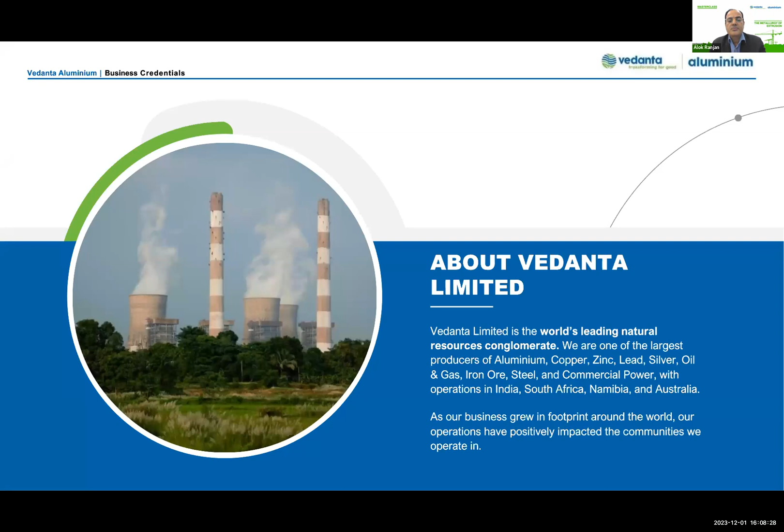So now we are truly emerging towards becoming a 3.1 million ton aluminum company with fully backward integrated operations with mines, and also 100% value added product. So that's the vision, and finally it's taking shape because investment is on the ground and work is in progress. Sometime next year, by end of next calendar year, we expect that all our planned expansion, planned investment will come through, and we will be maybe the second or third largest aluminum company in the world.

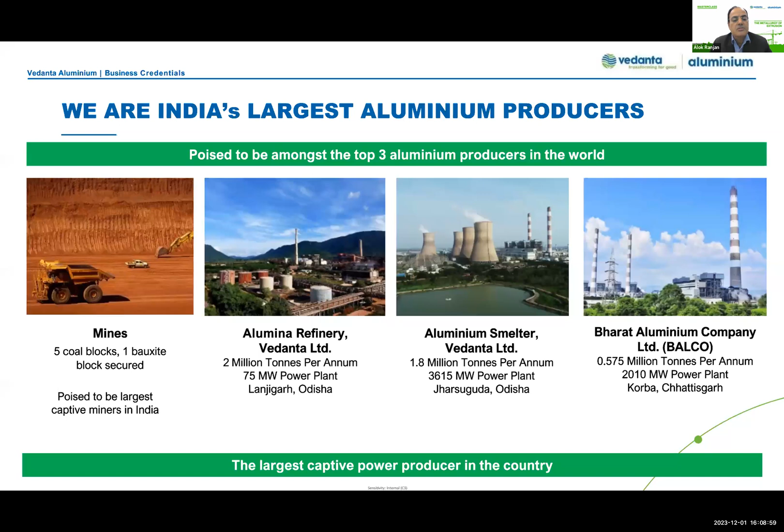Next page. Again, we are a company which has a full bouquet of services, so right from commodity ingot to various value-added products in the form of RP, billet, coils, so everything. Under one roof, we are in a position to cater to the requirement of the entire aluminum industry. And aluminum, as we know, is highly versatile, highly diversified in its application. And today we are in a position to cater to most of the applications.

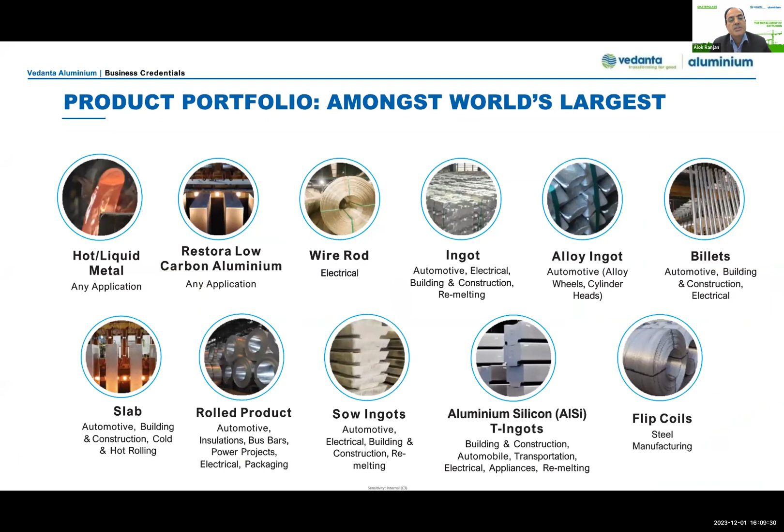Next page, please. So we take a lot of pride in a few things, that we are a company - and generally metals and mining need not be something which is incongruous to sustainability or the entire natural ecology. So we are very mindful of that, and we take a lot of steps. We walk that extra mile to ensure that we truly are considered a responsible company. And there are multiple steps which we have taken.

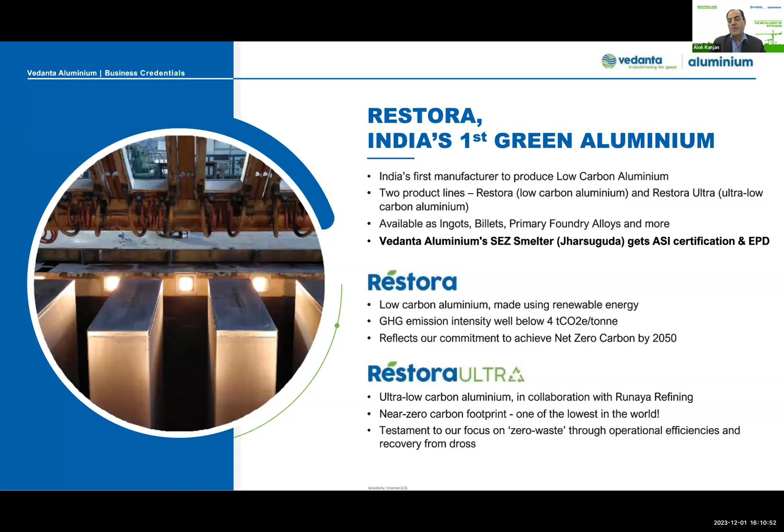Last year we became ASI certified. All our products from Vedanta SEZ have certification under environmental EPD. Last year we also started selling green aluminum, and some of it has the lowest carbon footprint, which we've started supplying in India. We encourage all our customers to engage with us, as we are in a position to supply green aluminum.

Moving on to our commitment to sustainability: we consistently rank among the most sustainable aluminum companies in the world, ranked second consistently. We were the first Indian aluminum smelter to have ASI certification for sustainable operations, with EPD for our entire product range. It has also become mandatory for products to be BIS certified due to a new quality control order, and we were ahead of the curve as one of the first companies to achieve this, so our entire product range today is BIS certified.

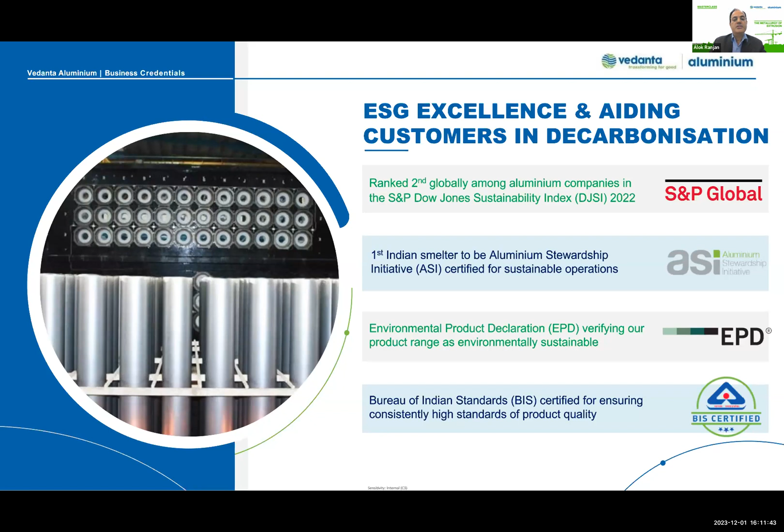Next, we offer a full range of billets from 6-inch to 12-inch, with best in class technology and various alloy offerings. We are very eager to understand customer requirements, and have a very active center of excellence and R&D team working closely with us. Today we are in a position to offer any kind of alloy, so if there is a specific alloy required, we are happy to work with you to develop that product.

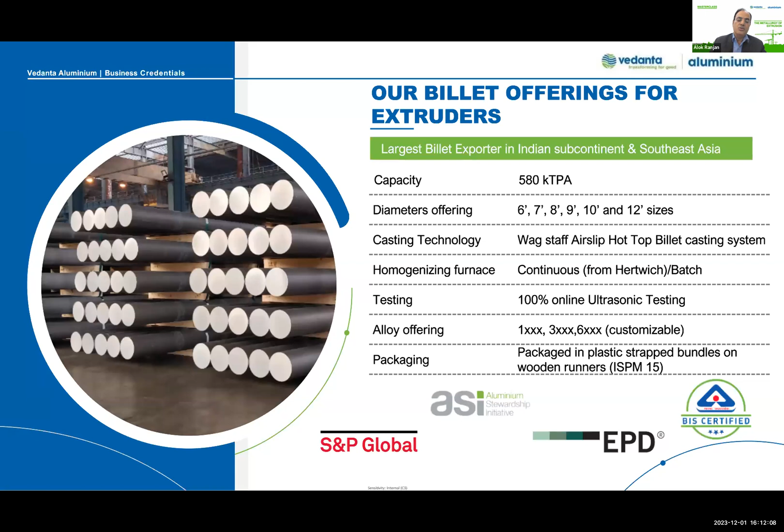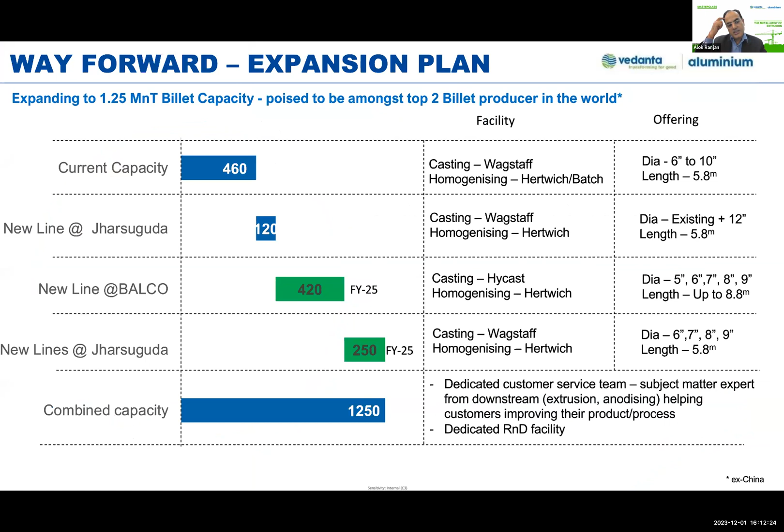We have very aggressive, ambitious plans to increase our production capability for billet. From the current 460, we want to go in excess of 1 million tons by next year, which will make us one of the largest billet producers in the world.

Reiterating some key strengths: we are consistently innovating, as innovation is at the center of our product development strategy. Over the years we've developed many new products like high-speed billet, high-strength alloy, machinable alloy, various series of alloys, and crash-resistant alloy, which find applications in diverse industries - automotive, defense and aerospace, building and construction. There are very specific requirements across the extrusion and building industries, and we have sustainably been able to produce all those billets for our customers.

We have previously talked about temperature control in the extrusion process, and we will touch on that briefly, but really the bulk of what we want to talk about today, based on customer inquiry, is on extrusion defects. So that will be the bulk of the presentation, with a specific segue into metal flow and planned scrap, really as a part of the extrusion defect discussion.

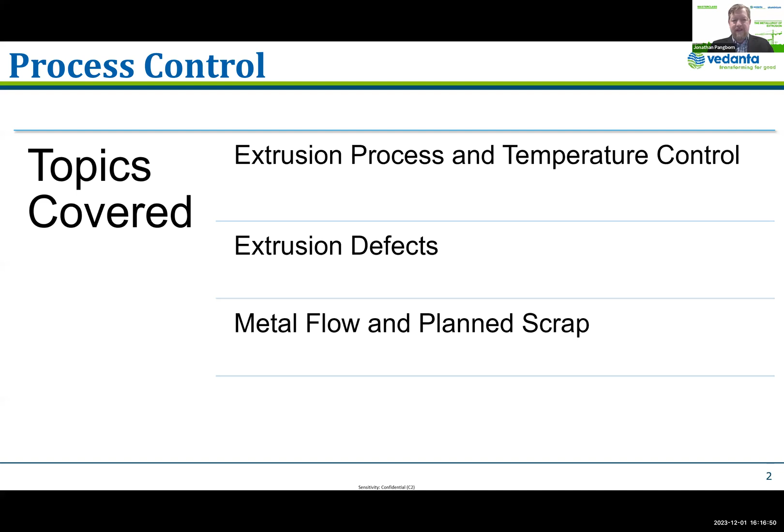I should point out, this is the scope of direct extrusion of 6,000 alloys. Other alloys are going to behave differently. For example, some of you are using 3,000 alloys, but a lot of these quality aspects are still going to apply. I do want to change my pointer.

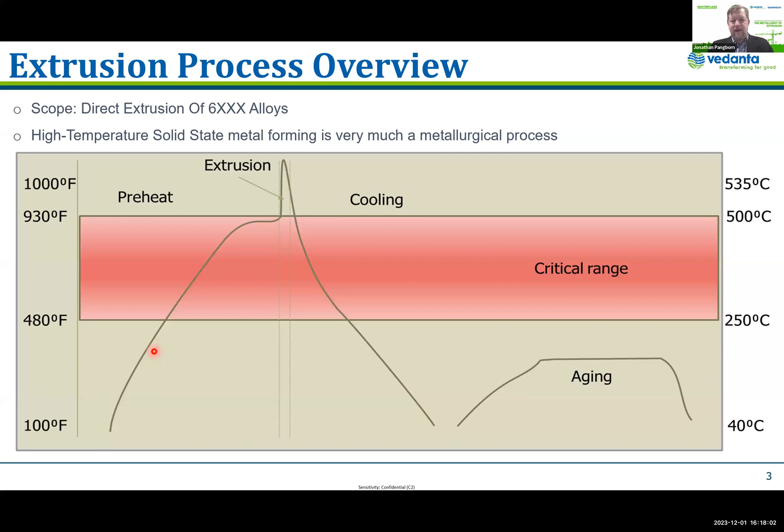There we go. But with 6,000 alloys, in addition to a forming process, we have a metallurgical heat treatment process. So I want to remind us that we need to be cognizant of that all the way through. And even though we're not speaking of strength levels and so forth in this presentation, there are effects on the surface as well. So here's the quality issues we wanted to highlight.

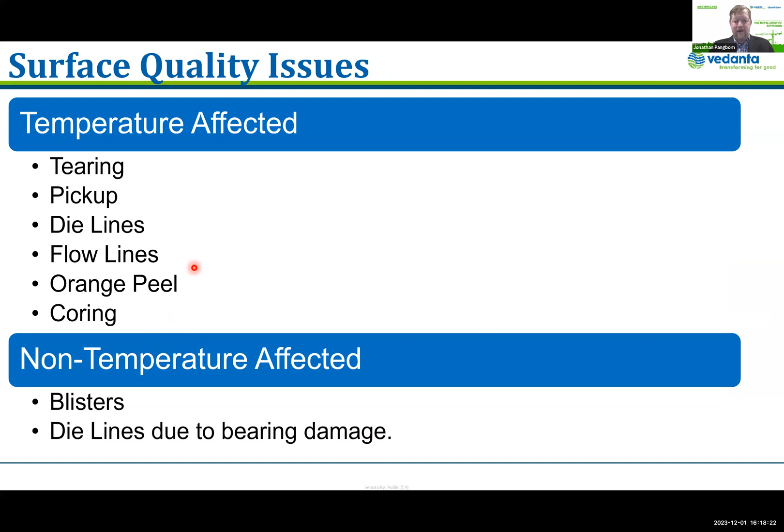I've divided them into ones that are more strongly affected by temperature and those where there's much less effect of temperature. I won't read those off. Many of them are undoubtedly familiar to many of you.

Basically, this is something we see, especially on sharp corners of dies and so forth, or at screw bosses. And in order to avoid this, we really need to look at the temperature control locally at that detail, and perhaps make adjustments to the process to avoid this. I would encourage you also to look at dies. If you have a die that is sensitive to this, work with your die shop, work with your die vendors. Really what you're doing is trying to even out the flow across the profile to try to avoid this.

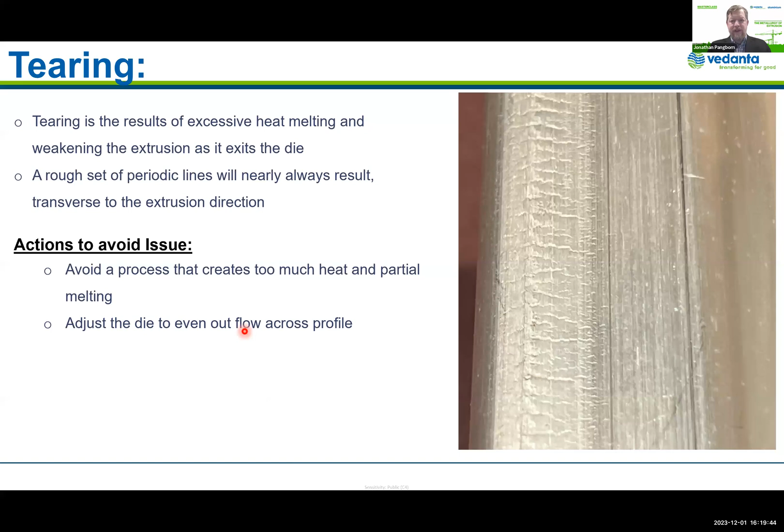It's a very complex defect, but fundamentally it's forming in the die as you're coming off the die bearing, and we'll have a diagram in a moment here. It's sort of spalling off, and in fact sometimes you can see this type of pickup that is actually very lightly sticking, and more than likely you could actually brush that off with a gloved hand or a little piece of cloth or something, and that would actually fall right off. It's very weakly adhered more than likely.

Some of the factors that we look at when we have these problems are with the die, primarily, looking at the shape of the bearing, making sure that it's the correct shape, that it hasn't been rounded, that your die bearing angles are controlled, and then also your treatment of it, specifically for most products, it's going to be a nitriding. There's other coating technologies, but usually it's nitriding your tool steel and making sure you have a very hard, resilient layer.

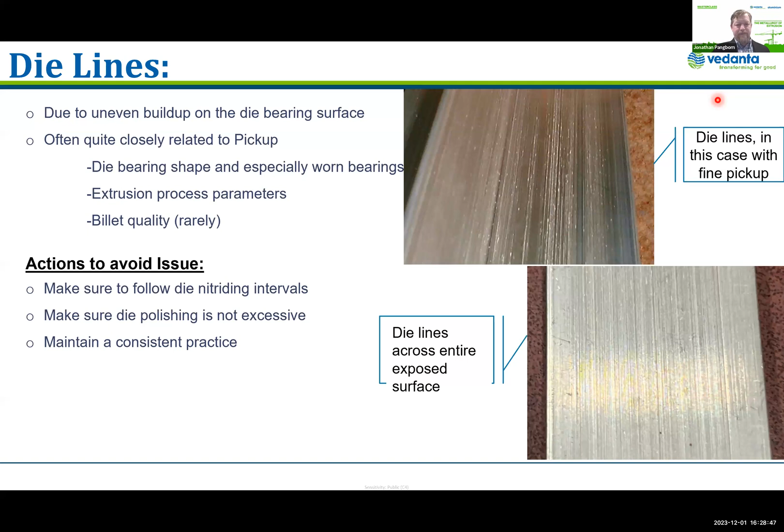But as your metal is going past the die bearing, the conditions continuously change from a high pressure situation to, as the metal departs the die bearing, really there's no pressure, no external pressure on the metal. The aluminum profile is self-contained.

So as that happens, you have a very dynamic situation where you have a sticking friction, this adhesive layer that we referred to, and there are a number of publications from different research groups that are very interesting if you really want to get technical.

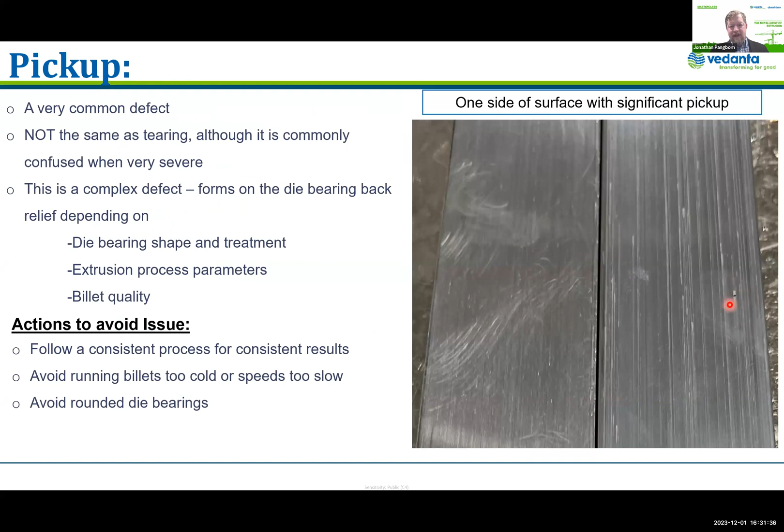Yeah, I did mention the bearing rounding is probably the single biggest factor that you need to look out for, that is at times not a controlled parameter at extrusion plants. You're controlling temperatures and speeds, for example, but you may have some inconsistencies in the dies that are coming out. Orange peel is, yeah, just like to hold on here.

One of the questions I've just received is, once you receive a die line or pickup, what would be your immediate next steps? The default would be, of course, evaluating whether that may be acceptable for the customer, if they can tolerate a little bit. But if it's deemed unacceptable, you would normally expect your crews to pull off the die and go on to another order, unless, of course, you have a backup die for that profile.

Yeah, but you don't want to waste time going back and forth and making scrap unless you have the resources in place, the right supervisor or manager or an engineer or something, where you're able to make adjustments to the process and have a good chance of really learning something from that.

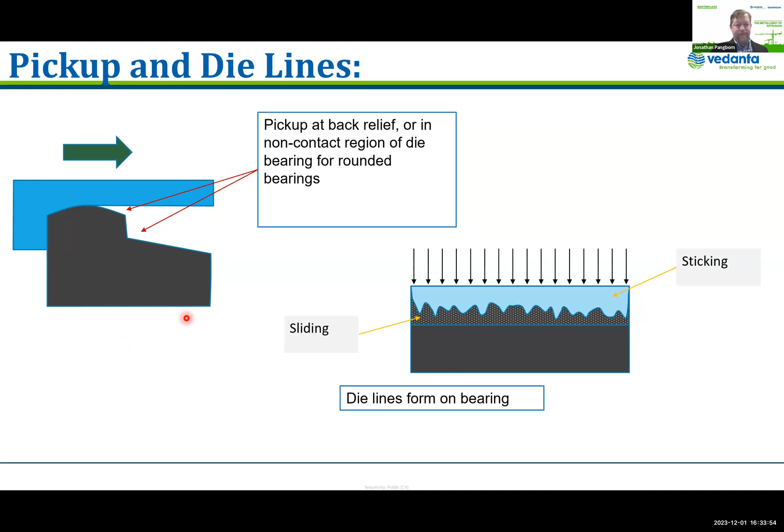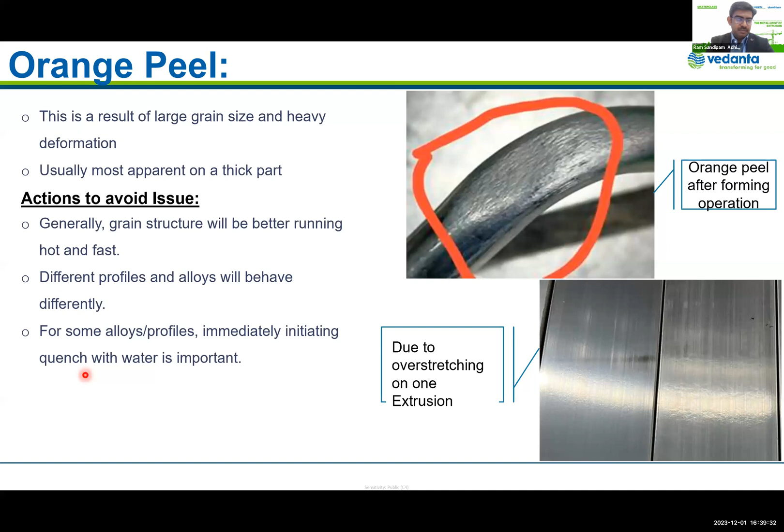Right, and I think in a single question you have answered two more questions. One was if this is applicable to 3000 series alloys as well, which you have just said that yes, higher manganese content can play this role, and whether there will be some role to play on the grain sizes in the orange peel issue. So I think you have also spoken about that, how that can impact and how we can optimize that. Very good. So I think you may please go ahead.

Okay, perfect. All right, moving to another common issue, blisters, a much different issue. This is not a metallurgical issue, and while temperature can affect the way the metal flows, you could consider the air or oil that's trapped in the blisters a form of contamination. It's not, net temperature control is not causing this.

It's about avoiding contamination of the process. These, of course, are air, possibly oil, that is in the process, and when the pressure of the die is released on exit, you very often can hear these blisters pop out, and you know, we'd audibly hear that there's blisters forming, and then you look and you see them. But it's basically controlling what's going into the container.

There's anything going into the container, of course, it has to come out at some point. And for air, for example, every time you're loading a billet, you're also putting air in there because the billet is not a tight fit. It's a very loose fit to the container, which is why we run a burp cycle, upset the billet, and then release the pressurized air, and why we pay attention to the sheared surface and so forth.

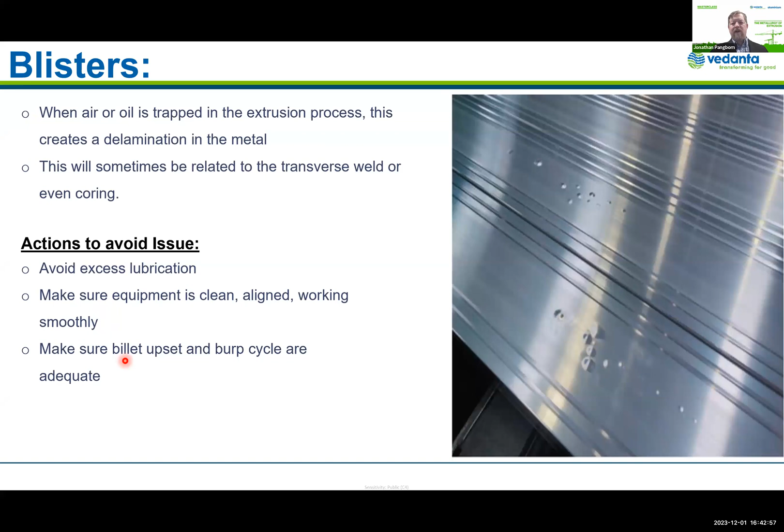And I do mention here the billet upset and burp cycle, making sure that those are set up properly, so we're removing all the air at the beginning of the process.

Any air in there, the next billet's going to seal that in. It's very unlikely to be able to burp any of it out, certainly not all of it, and we're going to see blisters probably towards the front end of the extrusion run out. That's actually another thing to consider. If your crews are reporting to you that they're getting blisters, ask questions like, where? Is it at the front end? Is it the back? Is it every billet? Because that is very important to problem solving on where blisters are coming from, because they can also happen anytime we aren't getting the air out.

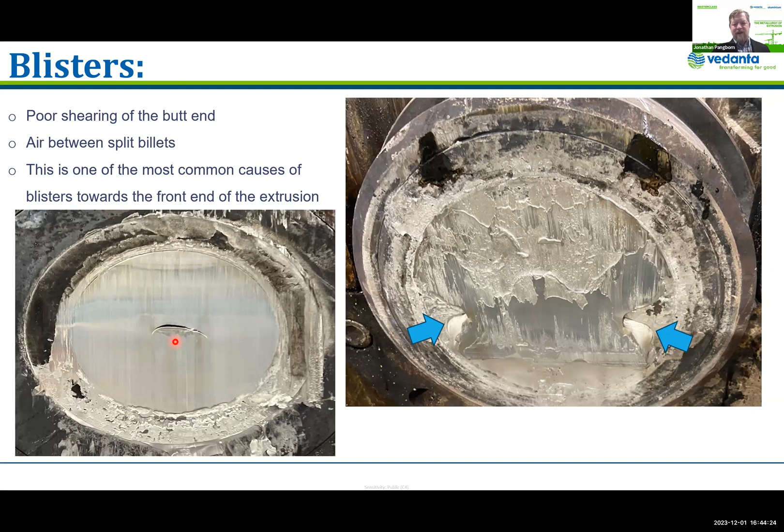Moving on here to coring. Your container is set at a temperature, hopefully well below your billet temperature, to arrest the flow of the surface layer, the segregation layer, or as it's roughly termed, billet skin that is on the surface. At the container surface you have almost zero metal flow, and then towards the middle the billet is moving much more easily. I think of it as analogous to a river. If we have a river near where we live, we know it's moving much more quickly in the middle than on the sides.

That's a good analogy for what's happening here, and in particular if we have good temperature control in our container, this black here is representing that billet skin. Rather than proceeding to flow into our dies, it's being collected in the back of the billet, which ultimately most of it is removed when we shear that butt off at the end. However, in order to actually get all of it, even with very good billet quality, very state-of-the-art, we would have to take like 4 inches, 10 centimeters, and then we have other problems, for example the blisters we just talked about.

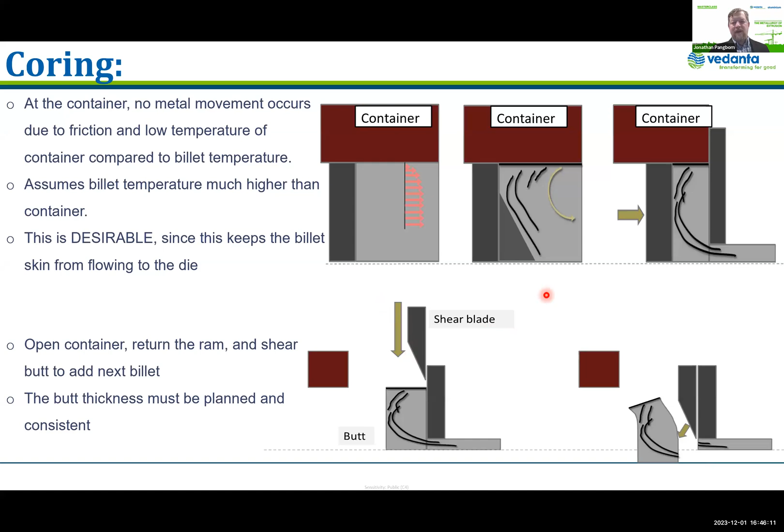So in practice, we have the shear coming down, taking the butt off, and most of this billet skin, but we're likely to have some of it in the die or in the profile on the next step. And then when we add a new billet, of course, anything that's in the die is going to push out. Remember, anything that goes into the process has to come out. By cutting that butt off, in addition to the pressure buildup and so forth that we can't have for pushing to a paper thin butt, we're purposely removing the majority of this.

But in this example here, a weld pocket and a stop mark on the extrusion, what will happen is anything that goes actually into the extrusion will be in the billet that was pushed. Anything that is remaining in the die, you won't see. You'll see it on the other side of the stop mark on what we would call the second billet, the billet following, but it's actually still cleaning out in front of the transverse weld some of that.

This is important for some products, but not all. We need to be careful with structural and especially heavy structural products where these impurities are not able to break up, due to a low extrusion ratio, but with low extrusion ratio dies these can be very important. Of course automotive or structural, any of you that do precision tubing, would have to be very careful with this, with your thin walls.

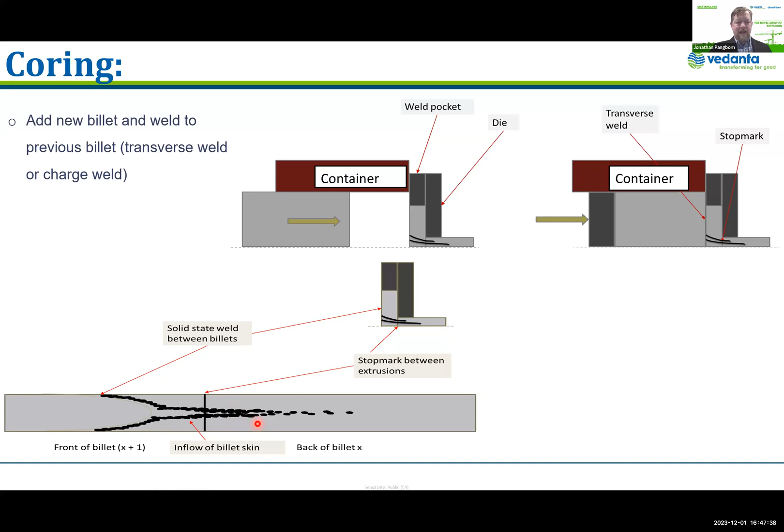And there needs to be a mechanism to cut this out. If you cut on the stop mark, it's going to look like this, where you have a transverse weld, which is difficult to see in this graphic. I don't know if you can see that on, yeah. And then you have inflow, and then it's proceeding into the front of the previous billet, which is actually the back of the previous billet, which is showing the back end of the runouts. So understanding how much scrap you have to take and following that is extremely important when it comes to these type of products.

I mentioned some of these type of products before. There can be others as well. These requirements can be determined experimentally quite easily. For example, if you go from your stop mark and cut periodically, whatever makes sense for you, every 10 centimeters or every 20 centimeters, and etch it even in your caustic if it's fairly fresh in your die shop, you will be able to see this and make some judgments on what's acceptable experimentally, and then make sure that it's followed and that your press crews understand the reasons for that, so that you avoid risks downstream.

We got a couple of questions on coring. When you're talking about coring, I think piping is a similar kind of defect, and in other languages it's the same thing. Yeah, that's equivalent terminology, also called piping, and I believe it's because if you have a very heavy shape like a rod, that's what it will look like - a circle in the middle, very dark circle after etching, like a pipe.

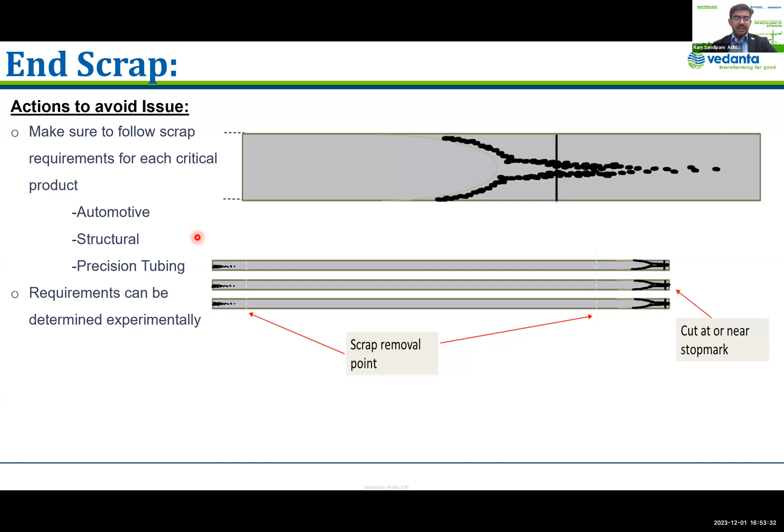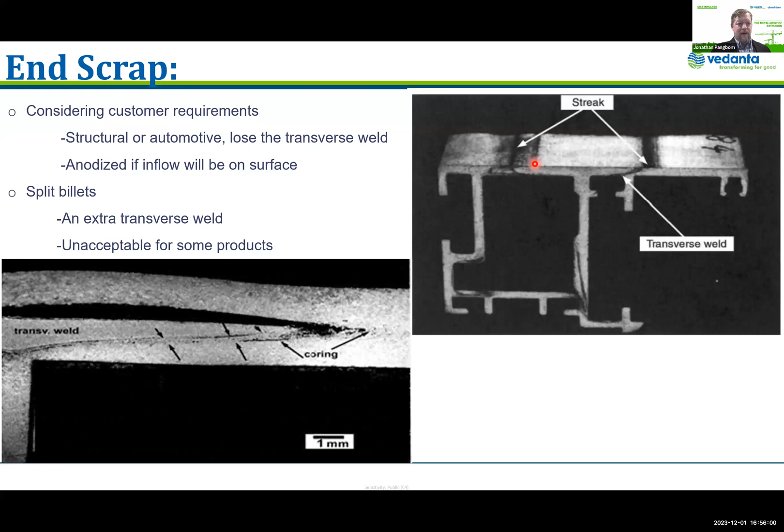So in summary, we went over the extrusion process steps, primarily focused on 6,000 series alloys, though most of what we talked about is applicable to other alloy systems as well. We spent most of the time talking about extrusion defects to understand the causes, emphasizing minimization of process variation, and a little bit on metal flow in the billet related to defects, specifically why we control scrap zones for certain products due to their sensitivity to these defects.